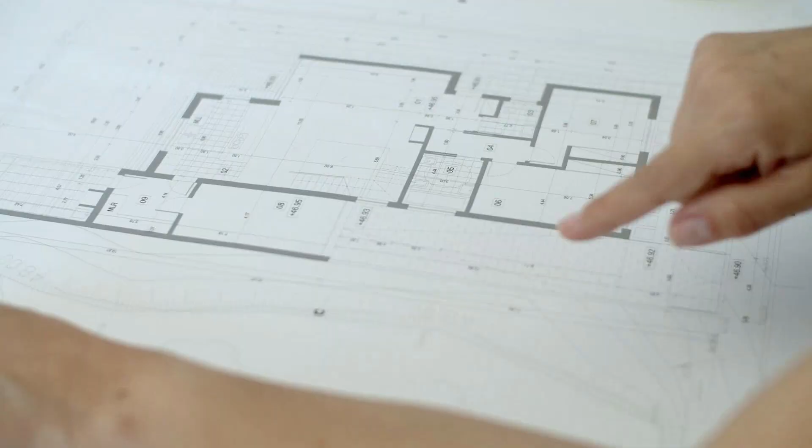Before we get into the 4 reasons, here's the number that matters. A typical tiny home on wheels, fully built, lands somewhere between 10,000 and 13,000 pounds on a dual-axle trailer. That weight isn't supposed to sit wherever the floor plan happens to put it. It's supposed to sit within a very specific window relative to the axles. And almost nobody designing these homes for the first time understands that the interior layout and the trailer engineering are the same decision. Let's get into it.

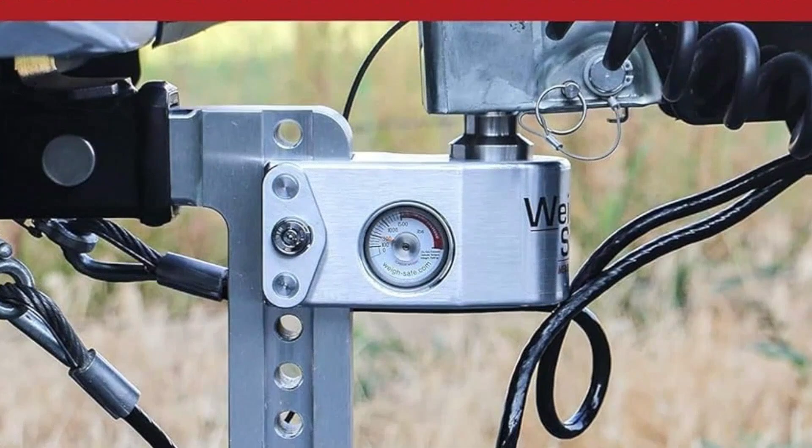Reason 1. The standard layout ignores tongue weight, and tongue weight is not optional. Here's the part nobody explains before you start sketching your dream kitchen. A travel trailer, and a tiny home on wheels is a travel trailer whether you like the term or not, needs somewhere between 10 and 15% of its total loaded weight sitting on the hitch. That's called tongue weight, and it's what keeps the trailer tracking straight behind your tow vehicle instead of fishtailing.

The standard tiny home layout puts the kitchen, which is the heaviest fixed component in the house between the appliances, the cabinetry, and the water lines, wherever it looks best in the render. Sometimes that's at the tongue end, which is fine. But just as often, in the layouts that prioritize a big farmhouse sink under a window at the back, the heaviest cluster of weight ends up sitting behind the axle instead of in front of it.

When that happens, tongue weight drops below that 10% threshold and sometimes goes negative, meaning the trailer is actually pushing up on the hitch instead of down. Engineers call this a low or negative tongue weight condition, and the practical result is trailer sway. At highway speed, a tiny home with poor weight distribution can start oscillating side to side, and once that oscillation starts, it tends to get worse, not better.

This isn't a rare internet horror story. It's a documented, physics-based failure mode that shows up specifically when a home's mass is centered in the wrong place relative to the axle. The fix is not complicated once you know to look for it. Heavy fixed elements, the kitchen, the water heater, the bathroom if it has a full tub, need to sit forward, ahead of, or directly over the axle. Light elements, the loft, the closet, secondary storage can sit toward the rear. Most builders design the layout for how the kitchen photographs. Engineers design it for where the weight lands.

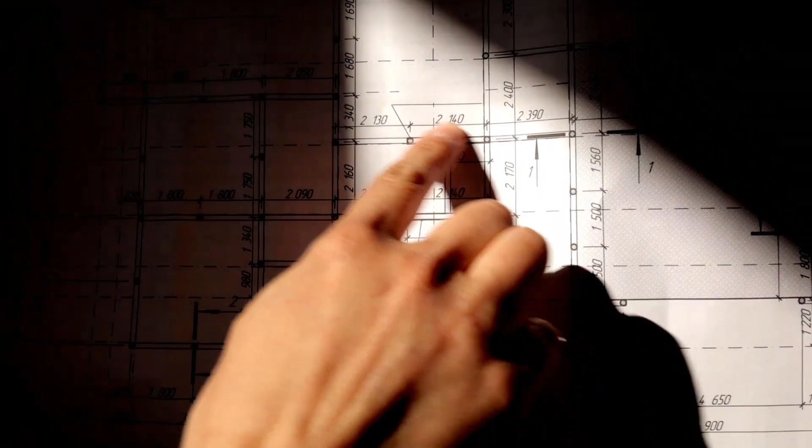In a 2,500 square foot house, losing 10% of your floor plan to hallways is an inconvenience. In a home where every square foot costs you somewhere between $200 and $400 fully finished, that same 10% is $2,000 to $4,000 spent on a corridor. Structural engineers and space planners who work on small footprint housing consistently flag single-loaded corridor plans as the least efficient circulation pattern available for anything under 500 square feet.

Precisely because the ratio of hallway to livable space gets worse, not better, as the total footprint shrinks. The alternative is a double-loaded or open-flow plan, where the walkway through the home does double duty as the kitchen aisle, or where rooms open directly off a shared central zone instead of a dedicated corridor. You lose the privacy of a hallway. You gain back a room's worth of usable floor.

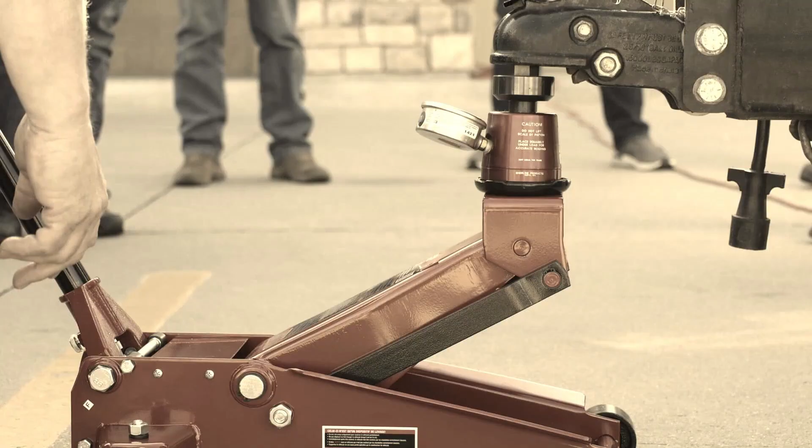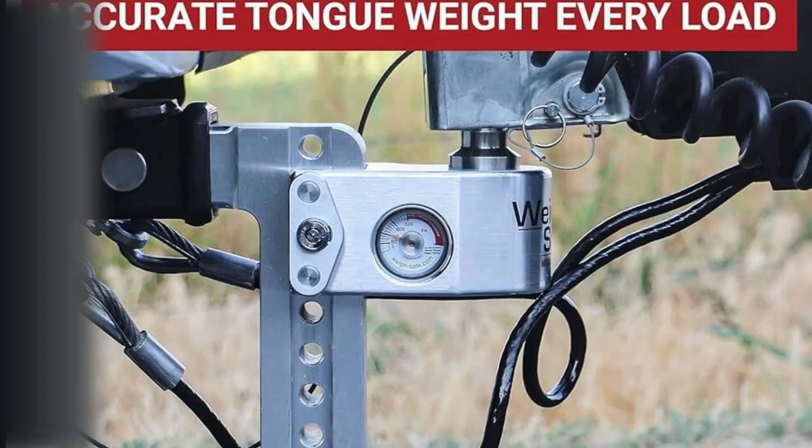Reason 3, and this is the mistake I promised you at the top of this video, the one that catches first-time builders who've done everything else right. The sleeping loft in a standard tiny home almost always sits over the trailer tongue, at the front of the home, above the hitch. It's an intuitive choice. Builders want the tallest ceiling height for the main living space at the rear, so the loft gets pushed forward.

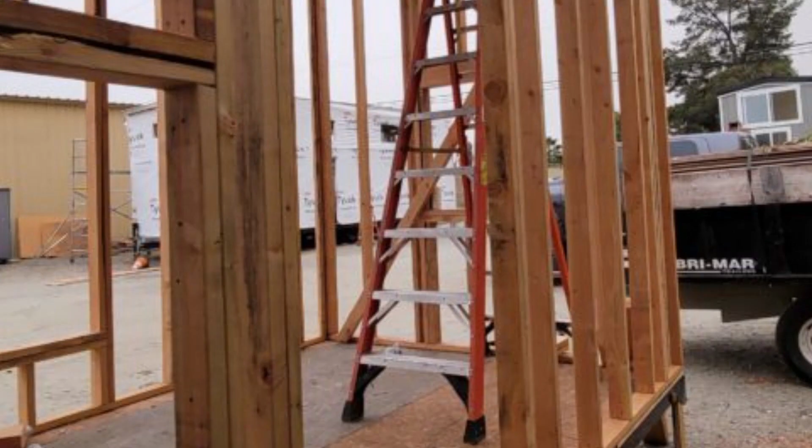The problem is that the tongue end of the trailer is structurally the worst possible place to stack additional weight. The tongue is a cantilever. It extends forward of the axle with nothing underneath it but the hitch connection. Every pound you add above the tongue, a mattress, 2 adults, nightstands, storage bins, increases the leverage working against that cantilever every time the trailer hits a pothole, a speed bump, or an uneven grade.

Combine a loft positioned over the tongue with a kitchen or bathroom also concentrated near the front, and you've built a home where the heaviest, highest, most leverage-sensitive load sits in exactly the spot an engineer would tell you to avoid. There's a second problem layered on top of the structural one, and it's a comfort problem. Heat rises, and in most standard layouts, the loft sits farthest from the primary living space's ventilation and closest to the lowest ceiling height in the house, which means the loft is simultaneously the hottest zone in summer and the most leverage-loaded zone on the road.

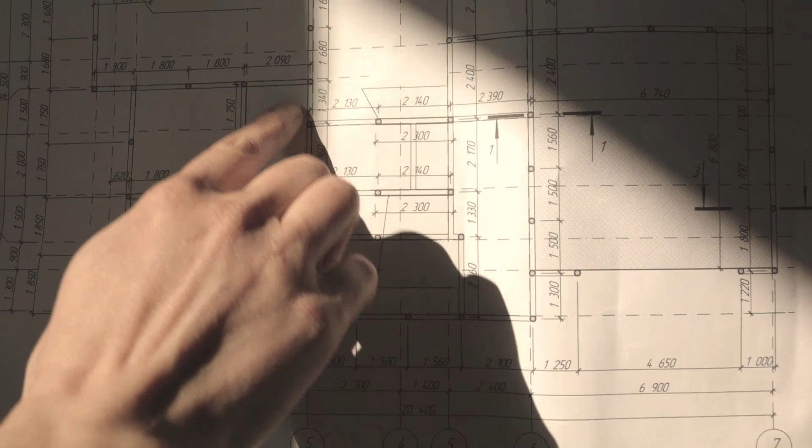Owners report loft temperatures running 10 to 15 degrees warmer than the main floor in poorly ventilated builds, specifically because the loft sits in the dead air pocket at the tongue end, away from the ridge vent or gable window that would actually move that heat out. The engineered fix repositions the loft directly over or just behind the axle, the most structurally stable zone on the entire trailer, and pulls ventilation, typically a gable end window or a ridge vent, toward that same zone rather than centering it over the main living area alone. It's a small shift on paper. It changes the entire weight and comfort profile of the home.

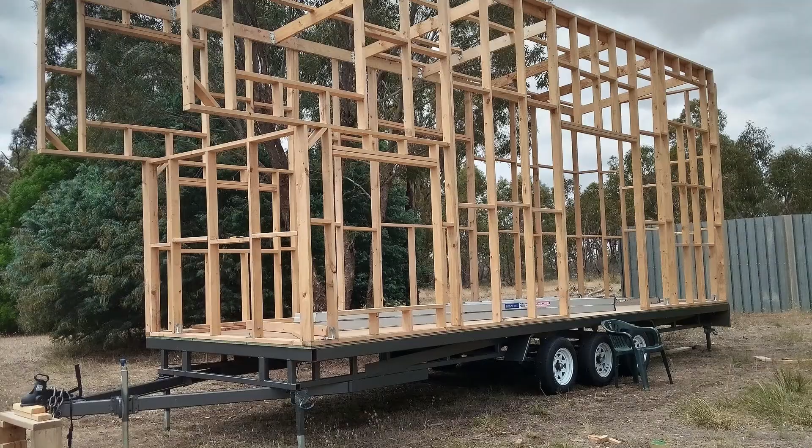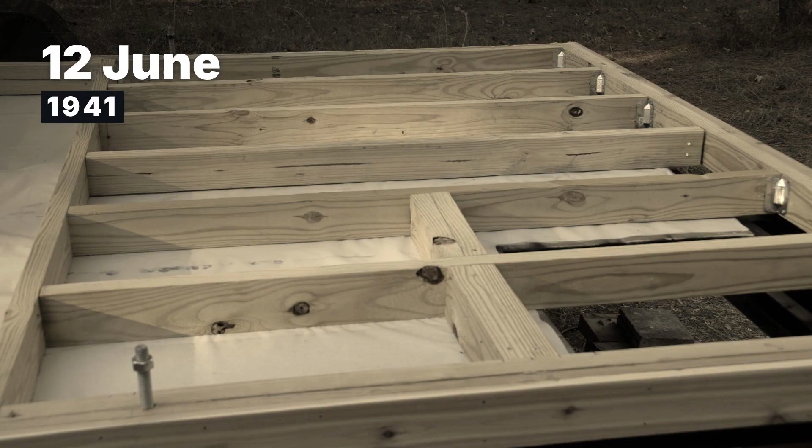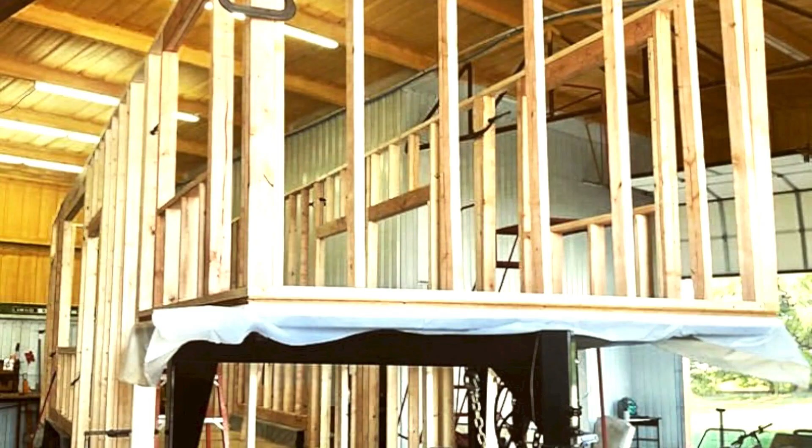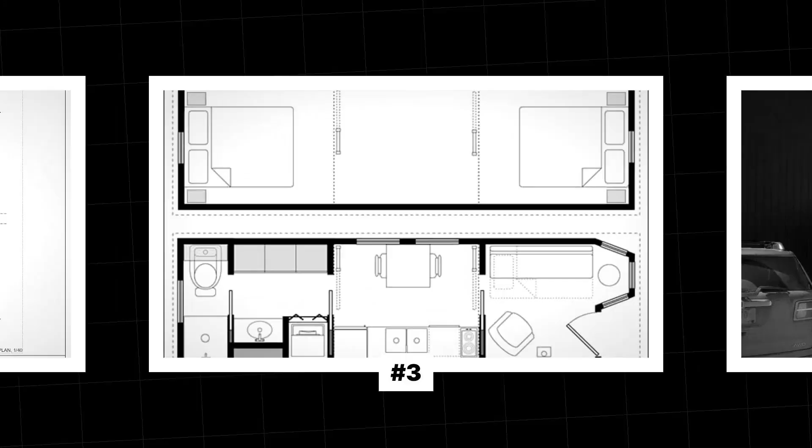Reason 4. The rectangular box with 4 hard corners is fighting the chassis underneath it, not working with it. A steel trailer frame flexes. Not much, but measurably, every time the tiny home goes down the road, especially over uneven pavement or gravel. Torsional flex, the frame twisting slightly along its length, is a normal and expected part of towing anything over a multi-axle trailer. A conventional stick-framed rectangular box built rigidly on top of that flexing chassis has nowhere for that movement to go, and it shows up over time as hairline cracks at the corners of windows, doors, and where interior walls meet the subfloor. It's one of the most common warranty issues reported by tiny home builders working with owners who log real highway miles rather than moving the home once and parking it permanently.

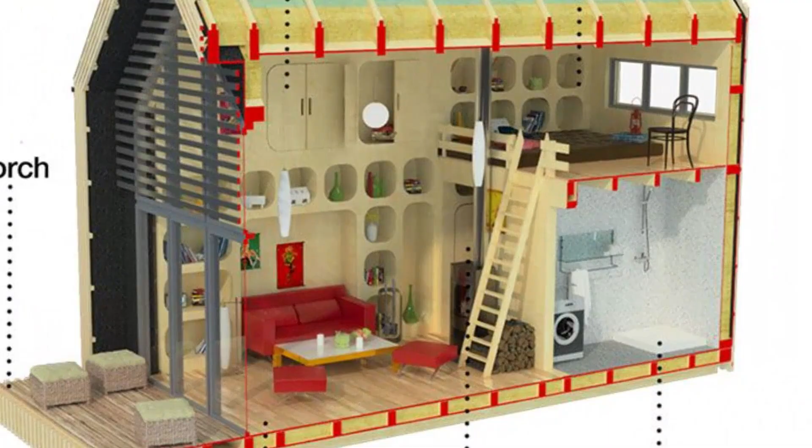Engineers who understand chassis dynamics generally recommend one of 2 corrections. Either the home is built with a floating floor system that decouples the wall framing from direct rigid contact with chassis flex points, or the layout itself avoids placing large uninterrupted glass or heavy fixed cabinetry directly at the corners, where flex stress concentrates hardest. The standard tiny home layout, chasing maximum window area at the front gable end for that Instagram-ready natural light shot, puts glass in exactly the highest stress zone on the entire structure.

None of these 4 problems mean the tiny home movement is broken. They mean the version of it that gets photographed and templated across builder websites was optimized for how a floor plan looks in a rendering, not for how 12,000 pounds of house behaves at 65 miles an hour, or how a family actually uses 320 square feet every day.

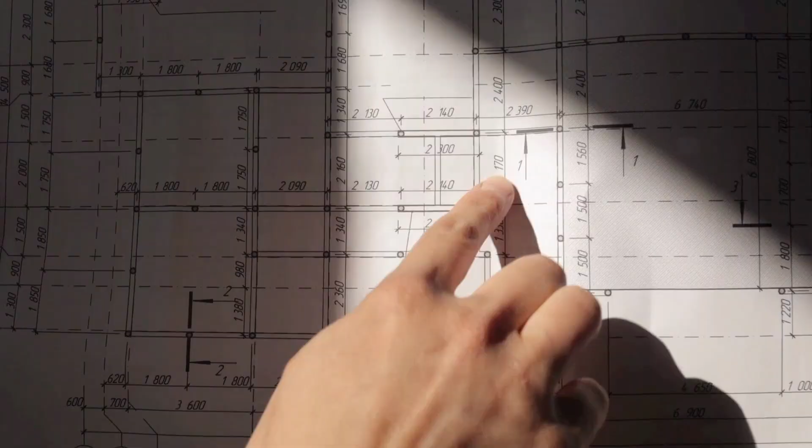Here's what an engineer-informed layout actually looks like in practice. Heavy fixed elements, kitchen, bathroom, water systems positioned forward of or directly over the axle. The loft repositioned above or just behind that same axle zone instead of out over the tongue. Circulation built into the functional rooms themselves rather than surrendered to a dedicated hallway. And glazing and heavy cabinetry pulled back from the highest flex corners of the frame.

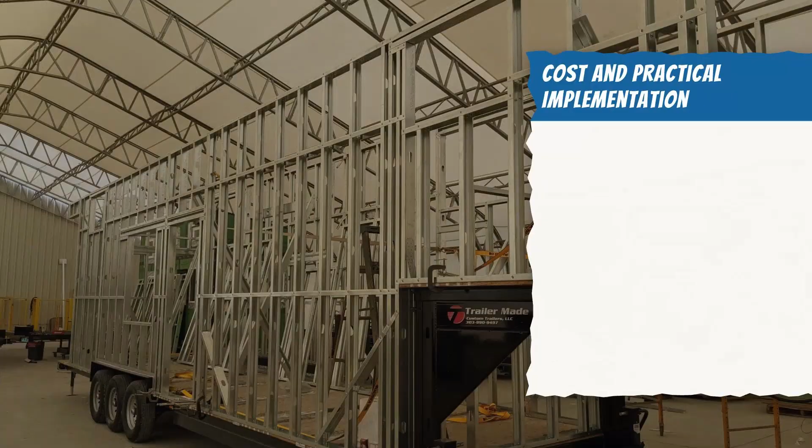Builds that follow this weight-forward, axle-centered approach don't cost meaningfully more than a standard build. The framing lumber is the same. The insulation is the same. The difference is almost entirely in where things are placed, which means this is a decision you make with a floor plan and a tape measure, not with a bigger budget. What it does change is towing stability, long-term structural fatigue, real usable square footage, and honestly, resale. Buyers who've done their homework are starting to ask trailer manufacturers and builders directly where the axle sits relative to the floor plan before they sign anything.

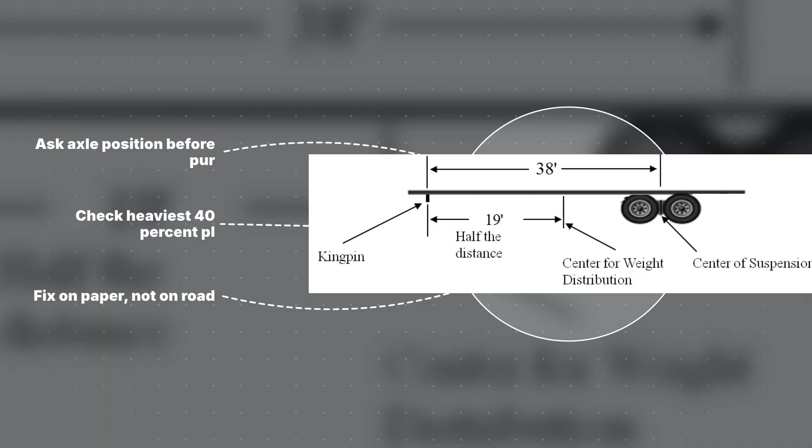If you're in the design phase right now, before you fall in love with a Pinterest layout, pull up your trailer's axle placement and ask one question. Where does the heaviest 40% of my home's weight actually sit relative to that line? If the honest answer is behind it, or worse, stacked in a loft, cantilevered out over the tongue, that's worth fixing on paper, where it costs you nothing, instead of on the road, where it costs you everything.